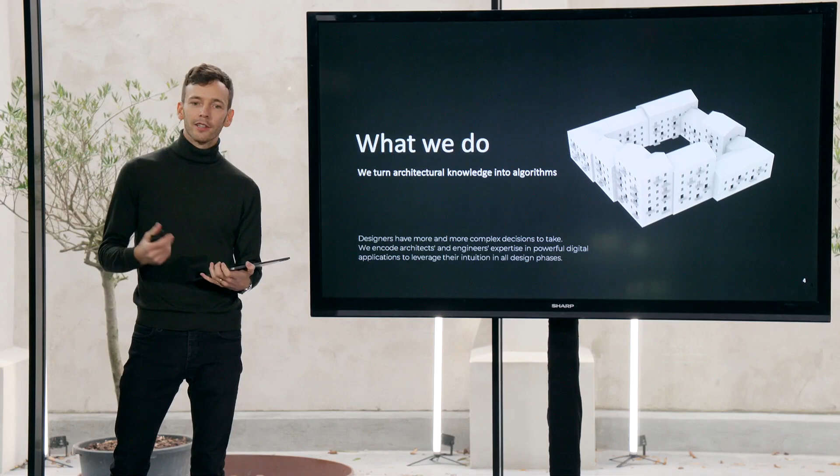What we do is we turn architectural knowledge into algorithm, by encoding architects and engineers' expertise into powerful digital applications to leverage their intuition in all design phases.

Our vision is to facilitate the way toward a more sustainable and performative architecture. Using the massive amount of data in the world around us, we deliver tools and interfaces in order to inform and communicate the performances of the design.

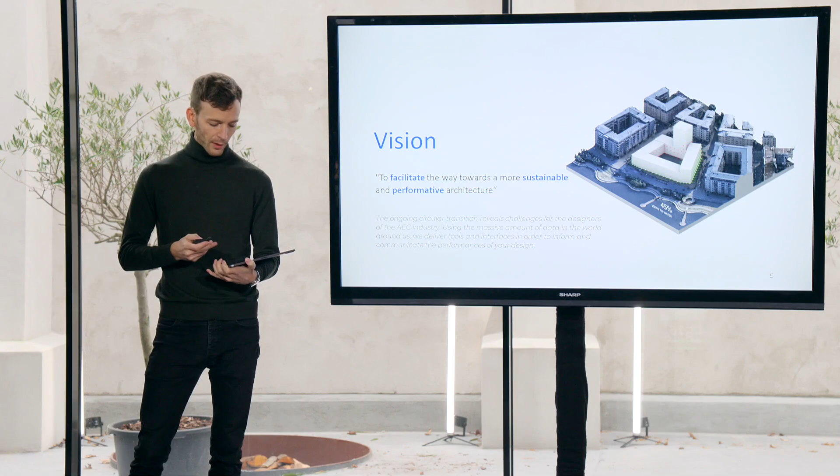So now, let's say how we work in democratizing high-fidelity daylight simulation through OpenBIM and the web. Why is that important? Let me tell you about a rising concern I see our industry is facing.

The awareness on the important role of daylight in indoor occupancy is growing from multiple fields, leading to better defined building codes or regulations, but also green label requirements, standards, and recommendations.

In Scandinavia, we are imposed by our building code to provide satisfactory daylight conditions in our buildings and our regularly occupied rooms. The Norwegian, the Danish, and the Swedish building codes differ in the methods for compliance, varying from simple window-to-floor area ratio to daylight factors or to climate-based daylight simulations.

In architectural projects, stakeholders such as architects, engineering consultants, developers, public authorities, each have their own opportunities and challenges regarding daylight.

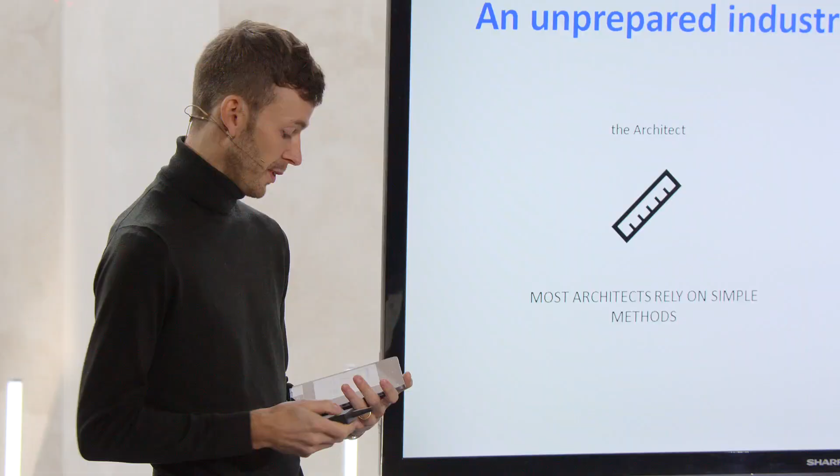Understanding and use of climate-based daylight metrics also diverge greatly, as we saw previously. Leading consultants do not always have a clear understanding of the daylight conditions, their yearly variations, seasonally and daily variations. We see, therefore, compliance chasing being the standard practice, where daylight is only assessed to tick a box.

The research and the academic world, as well as better defined standards, are providing us with valuable methodologies. However, there is a great potential in improving and applying good daylight in designs.

Verb, democratize: makes something accessible to everyone. Something - we are talking about the access to high fidelity daylight simulation. And everyone, by making the data work more, the consultant perhaps work less, for more projects to be assessed.

It's also important to involve the designers and also other decision makers. And to achieve this, to democratize, we may need the help of the wisdom pyramid, as I call it.

What does a daylight consultant do? In a nutshell, a consultant provides expert opinion, analysis, recommendations to organizations or individuals, based on their own expertise. They provide strategies to prevent problems and to improve performances.

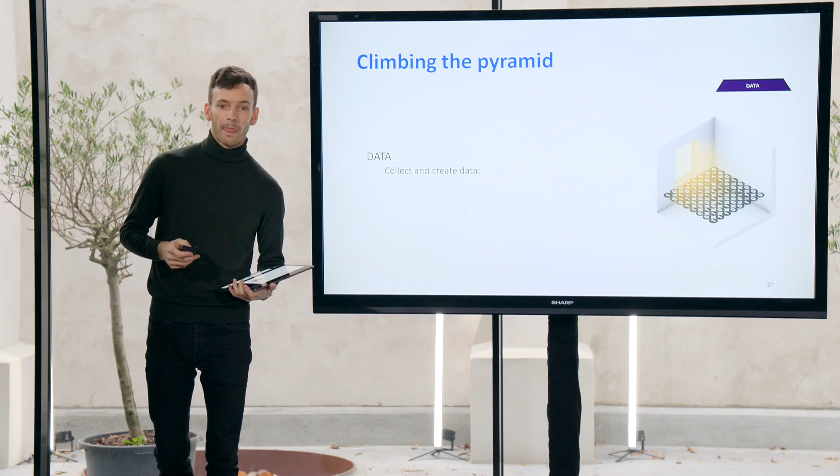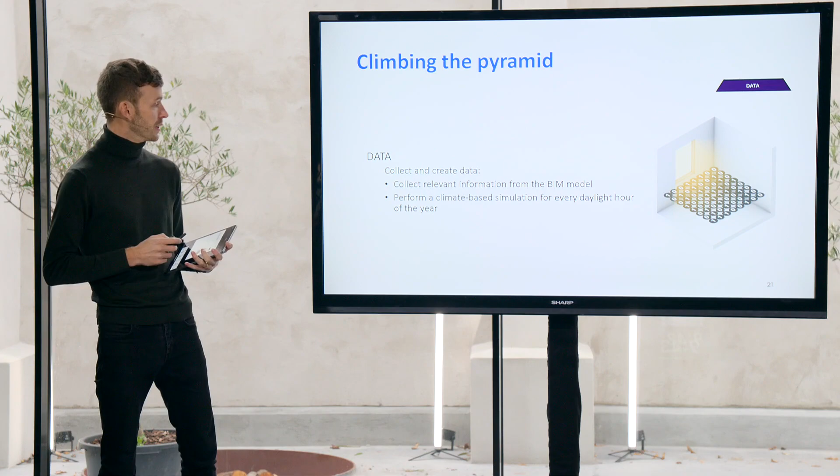First step is the data step. Collect and create data. Albert needs a lot of data to build its own experience. We can collect valuable data from the architect's BIM model, some metadata, but also, and most importantly, geometrical information. Then we simply need to perform annual climate-based daylight simulation.

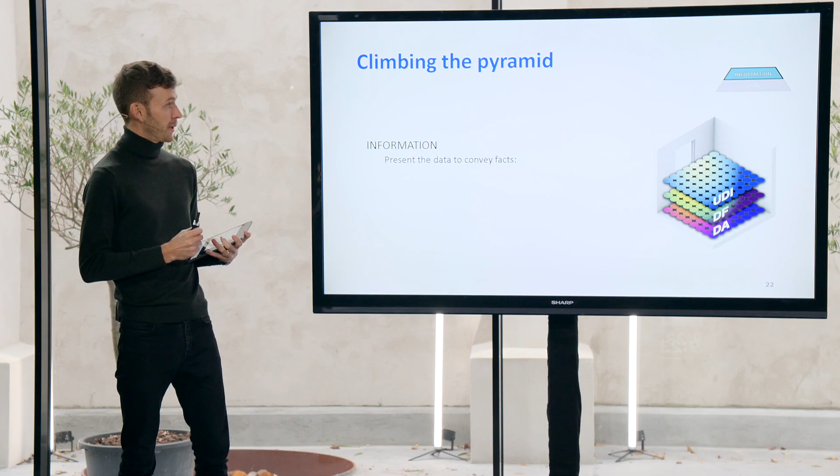Albert could then, as a second step, present the data to convey facts using the various climate-based daylight metrics to tell us about daylight availability in space, in time, glare potential, the uniformity of daylight, sunlight, glare potential.

Albert lives in the cloud, so we will use the web as a device-neutral platform, the web browser, since it's accessible by everyone.

We need now to teach Albert to contextualize the information, to give a practical understanding. It's important for designers and everyone to quickly be able to grasp if a room complies with a specific requirement.

It's important to rationalize the metrics to a simple yes and no answer. Albert can now give knowledge in a simple and clear manner.

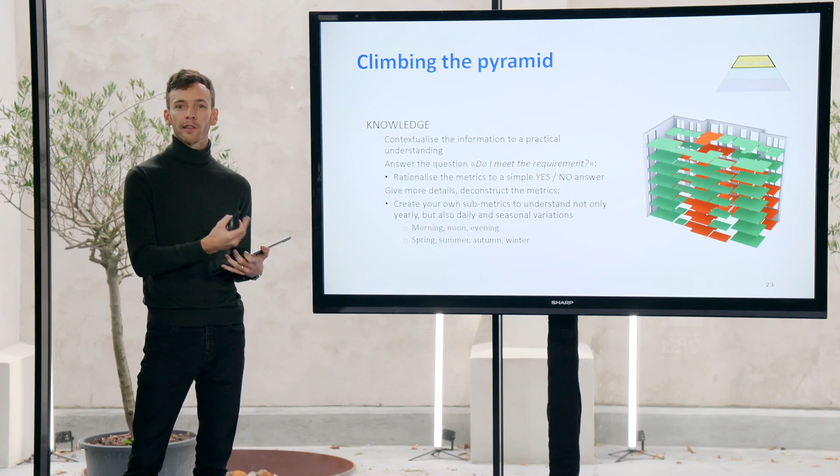Sometimes the question may be more subtle, and we may need a little bit more detail. You would like to know, for example, if an east-facing room is receiving enough daylight in the morning or in winter. Therefore, it's important to go beyond the standards and to dive a little bit into research for inspiration.

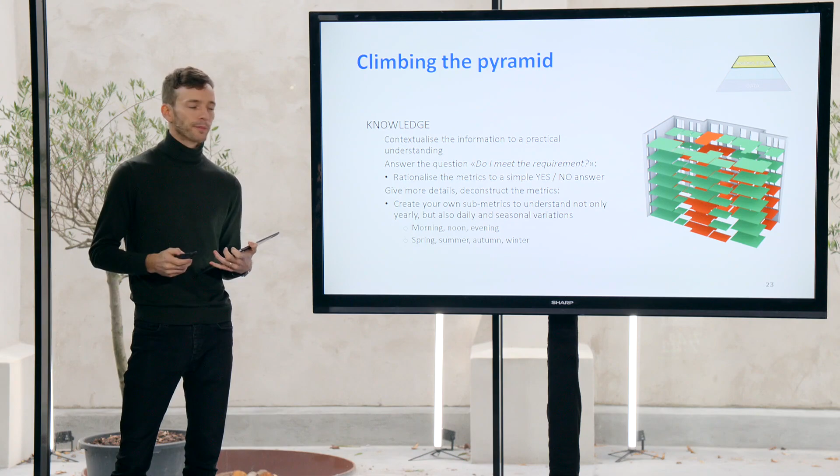It's absolutely valuable that the research and the industry stay aware of each other to together always help us deliver better methods. Thank you for all of you who are in the research and the academic world for lifting up our industry.

Finally, wisdom. It's about making a sensible judgment. And how could Albert possibly make a sensible judgment?

If we train our data and cluster various room-level recommendations with machine learning, Albert could do the heavy lifting of the consultancy. Of course, it's important for the teachers, or us, the daylight experts, to always revise and perhaps complement the recommendations.

It's also very important to involve the users and to allow designers and all other decision makers, disciplines, to comment, validate the assumptions.

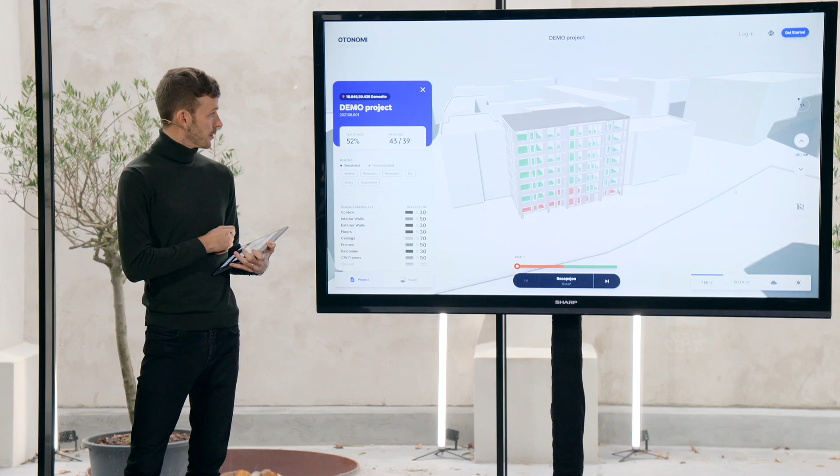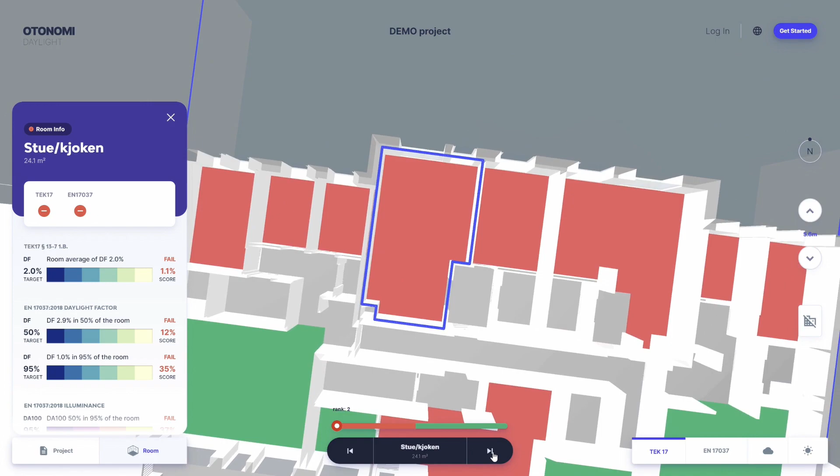Here is a short preview of our first attempt to amplify the architect and engineer collaboration, where project information is displayed, rationalized, pass or fail, green or red, information towards specific benchmarks, such as the local requirement or a green label, such as BREEAM or WELL, or point values displayed in a 3D model.

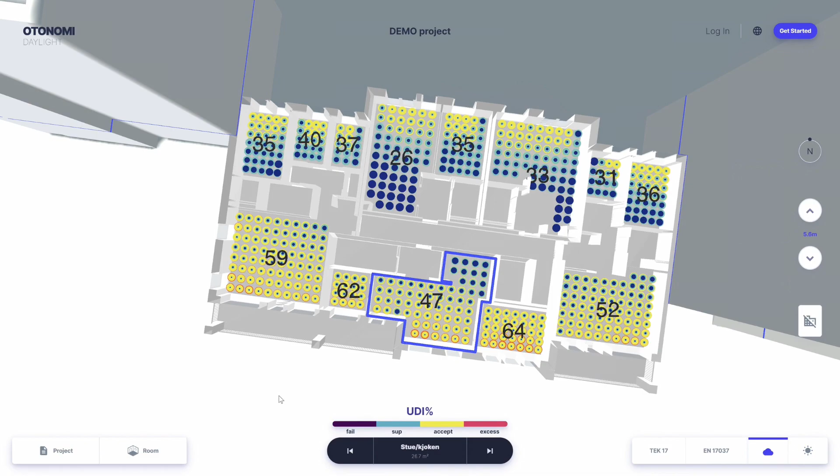So how do we create that? For the user, an architect, a designer, a BREEAM assessor, a municipality employee, which is looking to verify a project's compliance, a simple IFC can be used.

And our market in Scandinavia, luckily, is very BIM dependent. And architects can export IFC files. IFC classifications and IFC spaces have the required geometrical information needed for a daylight simulation. The output of the simulation could also be exported through the BCF BIM format back to the model.

Focusing on the web, computing is done on the cloud. So every device, a phone, a tablet, a computer, any operating system can access the simulated model in a 3D application, no files on your computer, and CAD-like editing is also possible.

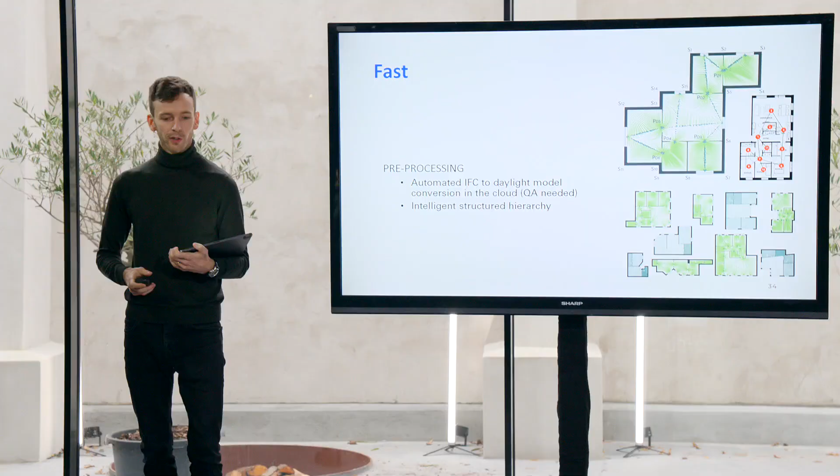IFC to daylight model conversion can be done on the cloud, and a QA guy can quickly estimate the validity of the model and eventually do some corrections.

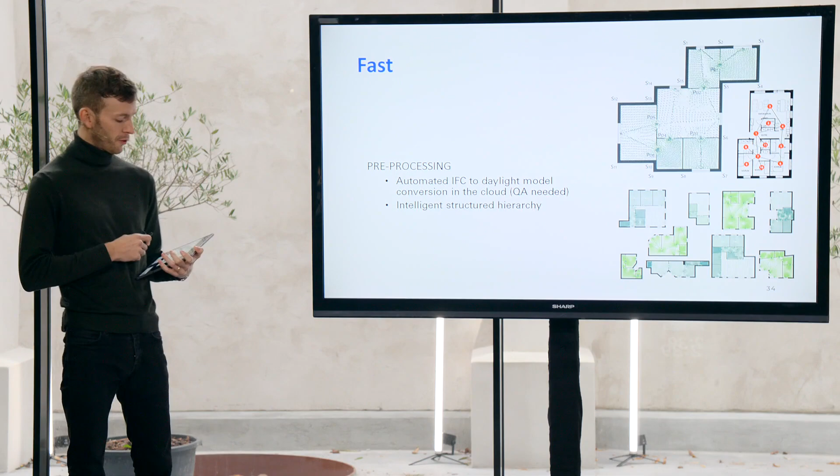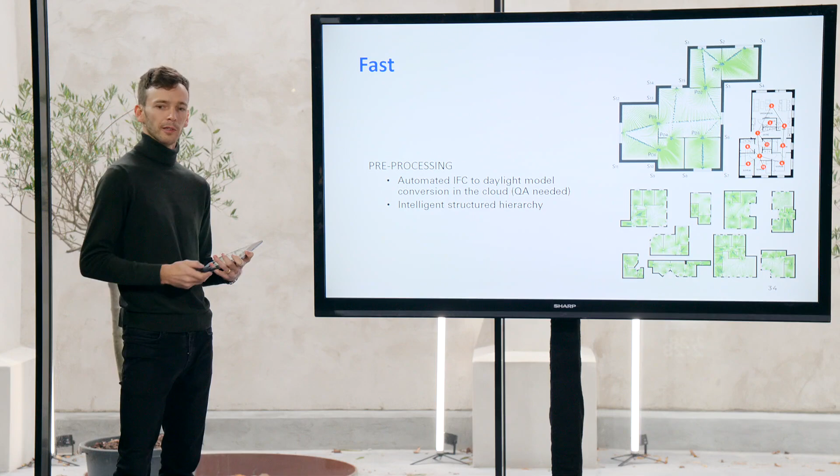Performant custom algorithms can understand an architectural project and classify rooms in a residential project to understand what is a bedroom, what is a living room, a kitchen. Other algorithms can also set appropriate light and reflection values to the geometries to convert an IFC file to a daylight model.

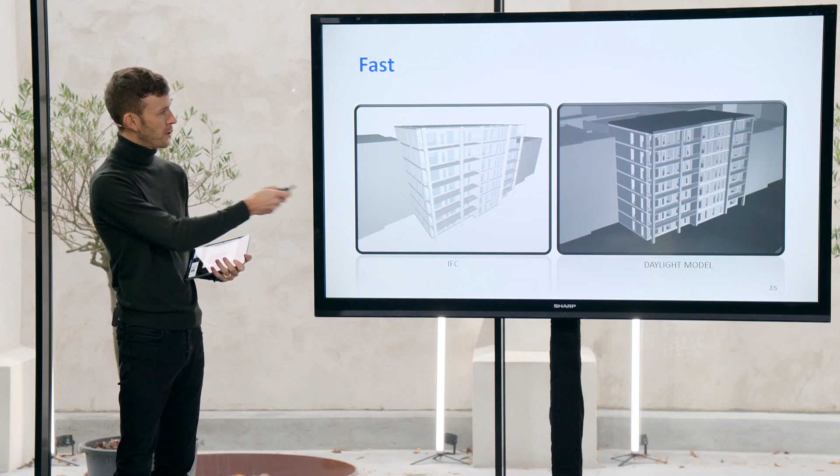Calculation speed has greatly evolved lately with multiple cloud solutions using CPUs, GPU local solutions, or you can also create your own architecture.

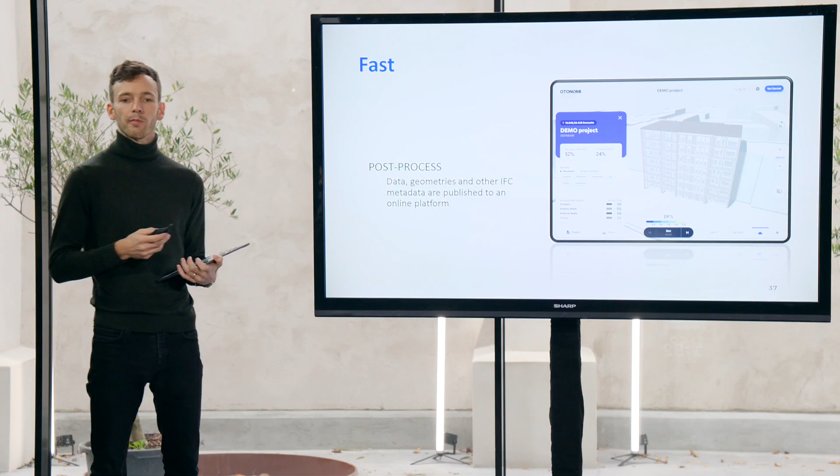Data, geometries, and other IFC metadata can be published to an online platform directly after simulations. Raw simulation data is uploaded to a server where custom functions calculate the appropriate metrics. And the metrics results are benchmarked against a building code or a certification scheme.

Well, of course, radiance is the holy grail here. What else? But of course, you have to comply with all the standards and methodologies.

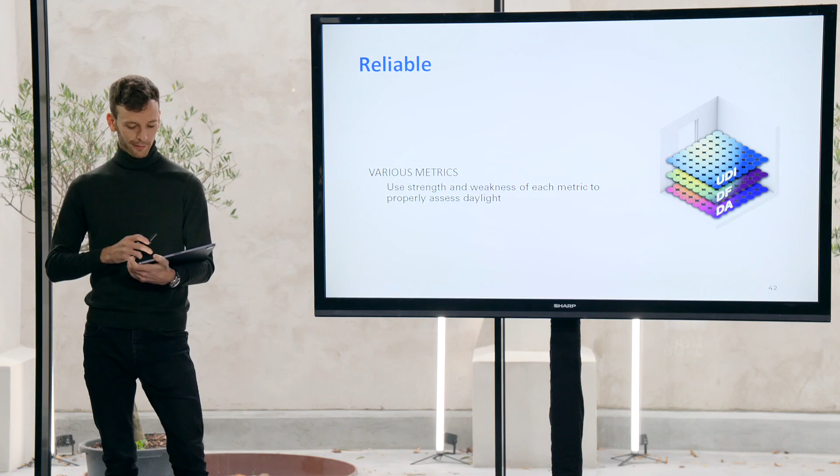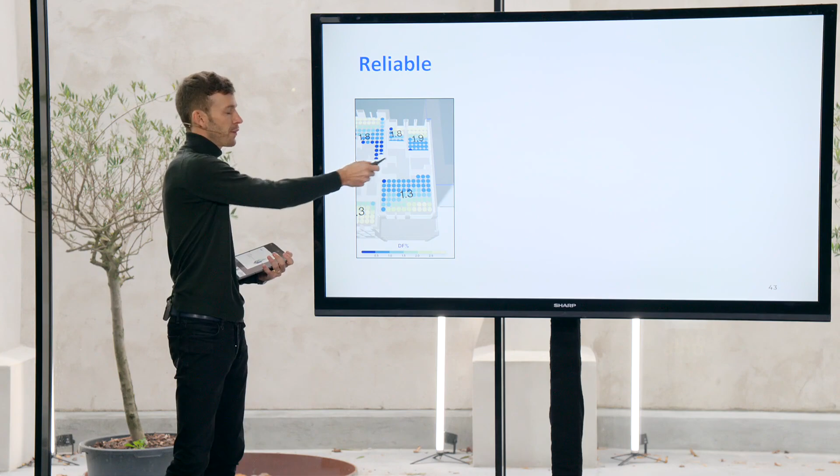Reliability is also ensured by measuring various metrics and looking at them together to understand the strength and weakness of each of them. Here is an example I like, for example, of this project where this south-facing room has a daylight factor of 1.3. The north-facing room has a daylight factor of 1.9. Many consultants will unfortunately assess that this room has better daylight access.

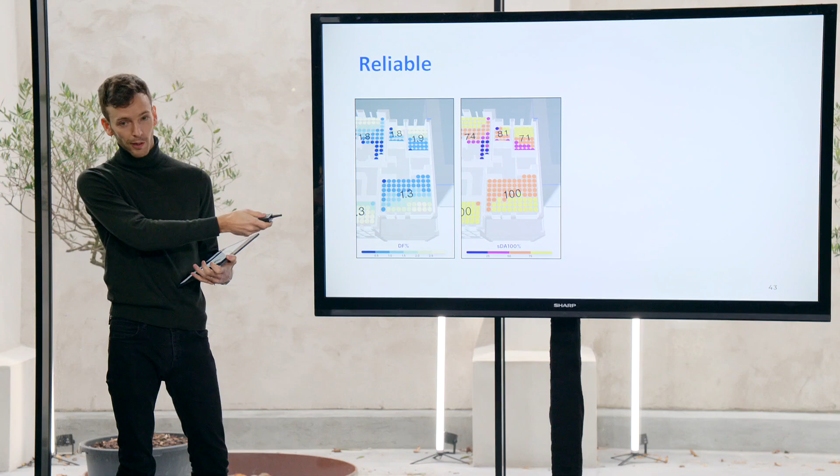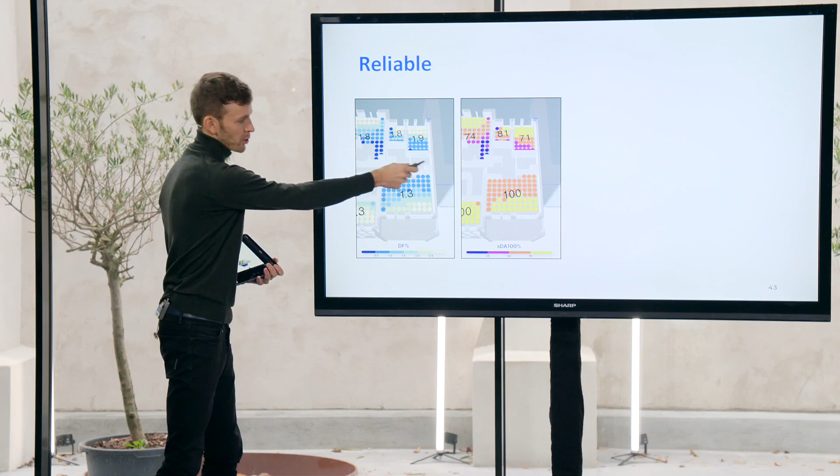But looking at how much of the room has lux values above 100, has spatial daylight autonomy of 100, we see that the south-facing room has much more light uniformity. UDI also gives interesting information. And we also see that the southern room also has much more annual sun exposure.

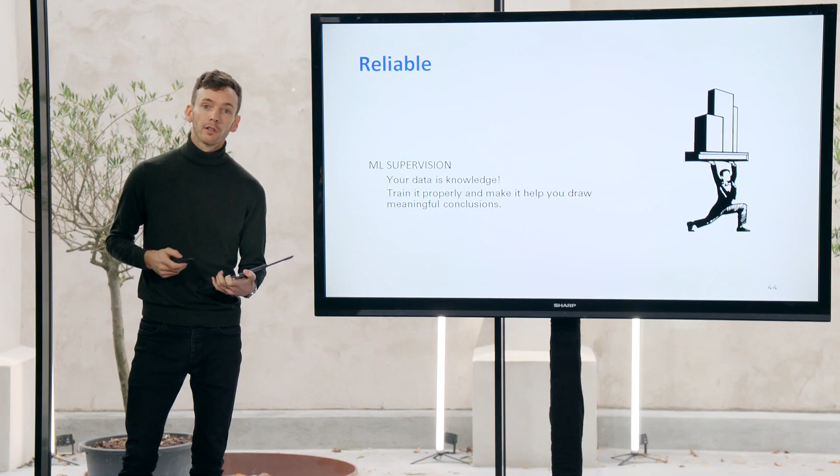Your data is knowledge. We must train it properly and make it help us draw meaningful conclusions. Have your own butler at your service. We are still working on this part, so I won't show too much here.

Take the lead, create your own collaborative platform, support our industry, support research. This is only our attempt to create a platform-neutral solution. Please help us deliver the same in your industry. Thank you.